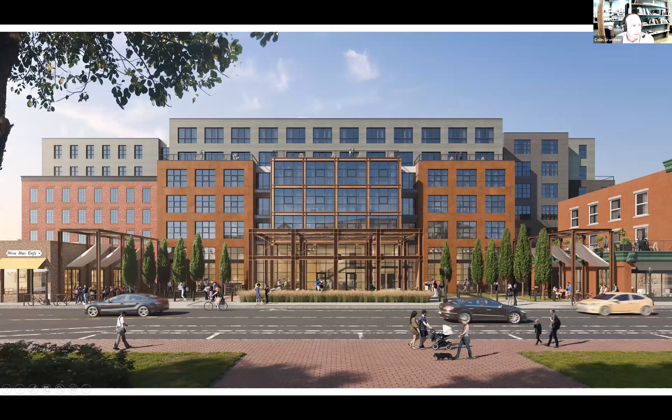The design team worked diligently to respond to the design reviewer comments.

The nexus of the project is really this central courtyard opposite the police station, seen as the draw for the project, creating a nice public or public-private space on the way to the train station, and helping fill in missing gaps in the streetscape as you transit between the train station and Washington Street, while also creating an enriching place for residents and patrons to enjoy.

One of the comments was related to landscaping. We worked hard to reduce the landscaping and the appearance of no-walk zones - excessive planting beds or plant material that would make people feel uninvited into the plaza. We've developed a bosque concept of trees, very much limbed up in stems that meet the plaza material. The green surface is seen as a minimal turf, just covering and infilling the design of the plaza where the trees are.

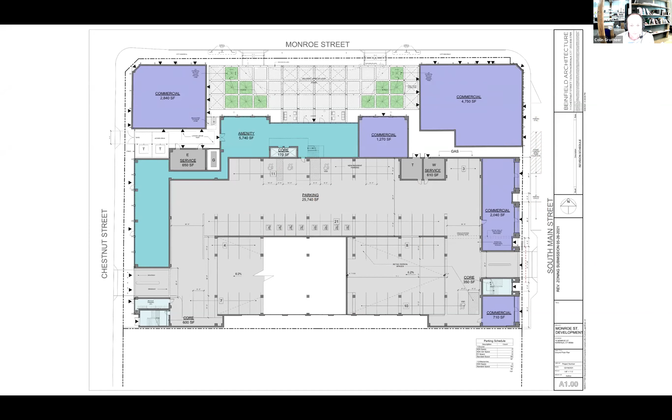That pretty much wraps up the first floor. A quick look up above, we've got a second tier of parking, which is how we get to our 157 spaces total.

This is the typical residential level at the courtyard. There's a small resident amenity space, as well as your typical appointments in the central courtyard, such as a pool, some sort of hangout bar structure yet to be designed, likely a shade structure with grill stations, and other amenities residents use, as well as lounge areas. The units on this level have their own private terraces fronting the landscaped courtyard, with a southern exposure, so it should get good light throughout most portions of the day.

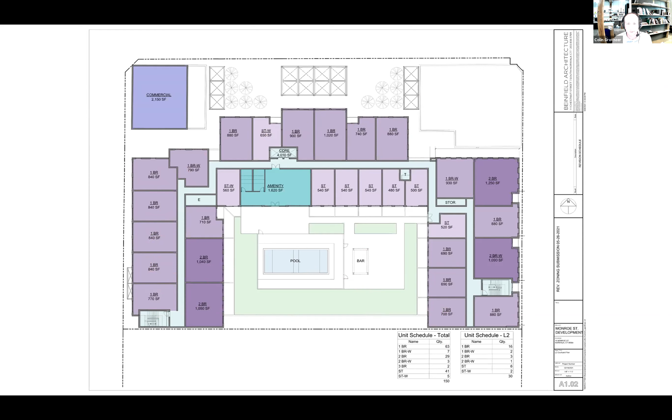The floor plan replicates itself up through the building. At the fourth level, per zoning, we step back, so it gets a little reduced, and the unit typology changes on the street frontages. The units that front to the north on the courtyard have relatively gracious private terraces, as well as good views, as do the eastern and western units that are stepped back, so you get some very nice private space up there. The interior program remains the same and consistent with the program below.

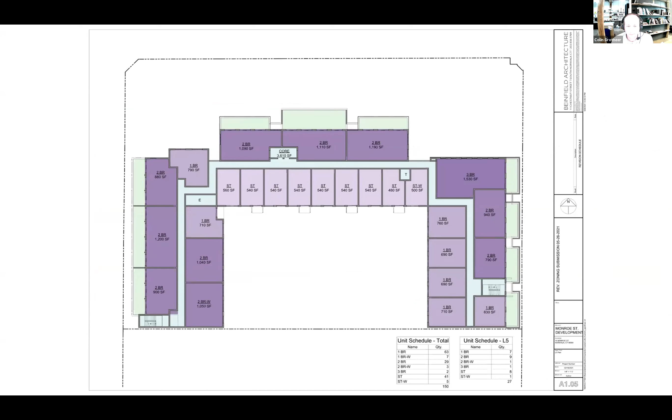Getting into the reviewer comments on what we're doing to the historic or existing buildings, number 18. Can you go back to the design and point out where the workforce housing units are located? I can cover that, I have a whole slide for it. Okay, that's fine, you can come back to it. Let me just make a note, workforce, before I kick it to Mike.

Going back to the reviewer comments, he was curious what we were doing and proposing on the existing structures. This is number 18, the Central Hotel. We'd be cleaning up the masonry, stripping it of the existing paint, repointing and repairing it as needed. If we deem that repainting is necessary, or in the interest of the building, then we could repaint it as well. We'd be doing repairs to the upper cornice, bringing that back to life, and extending the retail entablature all the way down Chestnut Street. This is the Chestnut Street elevation we're looking at, and reopening the existing and previously existing window openings, as well as installing building mounted lighting to light the sidewalk.

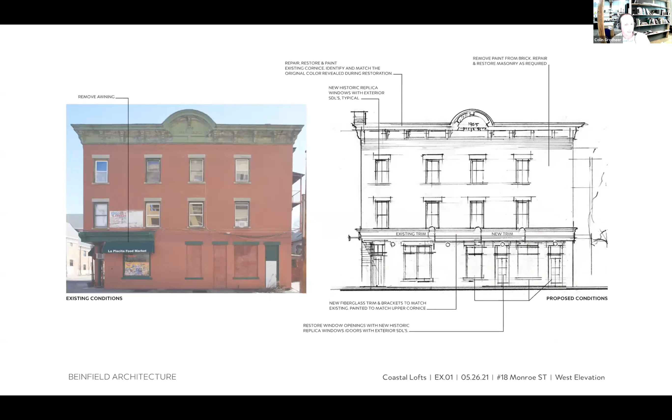Much of the same is happening on the north elevation, adding new awnings and new storefronts. There are existing appurtenances and fire escapes here that we'd be looking to remove and repair whatever damage was caused to the facade by their installation, and take the existing doors and return those to being windows, so it's a much more architecturally consistent facade with the nice character this conveys to the street.

You can see this is one of the steel structures flanking the plaza that we're proposing here. That would allow the tenant on the plaza side of the building to have some covered and shaded space that's also visually interesting, and somewhat mitigate the scale discrepancy between the two flanking existing buildings. We're also proposing, if possible, a small roof terrace for the office tenants in the upper stories of this building.

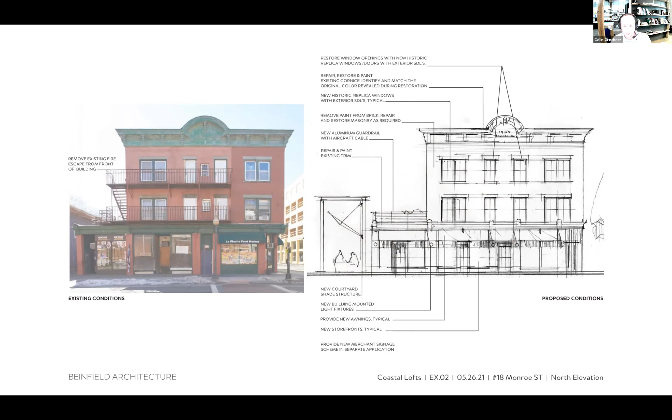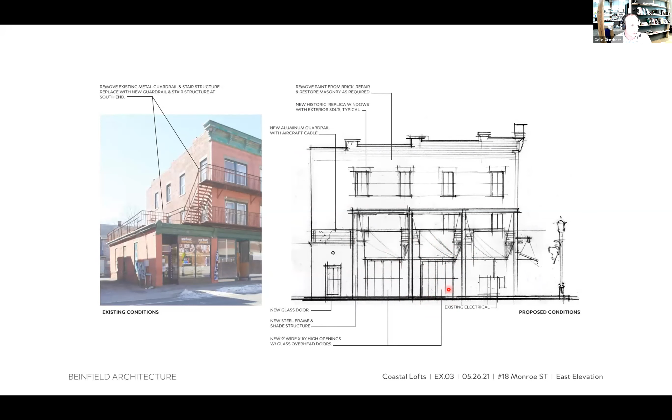This would be a view from the courtyard, where you can see the removal of the existing appurtenances and the creation of the roof plaza or terrace, and then the opening of some existing openings. There are 3 existing openings here, so we're trying to keep within those or expand them slightly, keeping the same classic vocabulary, and infilling them with some glazed openings and access, so that tenant can access the courtyard and take advantage of the space we're creating.

There's also some steel work on the back of the building that we'd be looking to remove, and this little shed here—really clean that up and reprogram those windows, give it new windows and that sort of stuff.

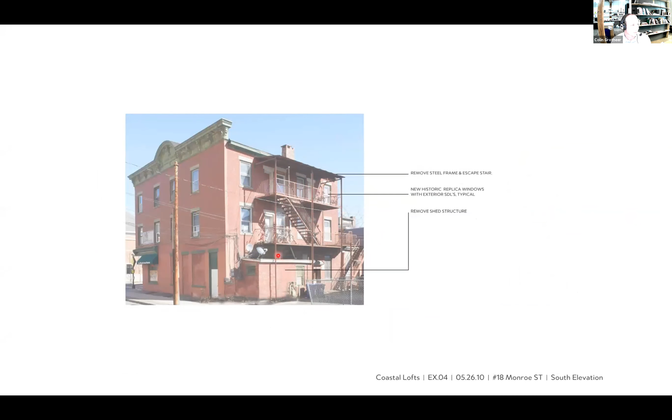Looking at number 8, it's much the same. We'd be looking to unify the signage with a future application.

Thank you. Excuse me. Getting water.

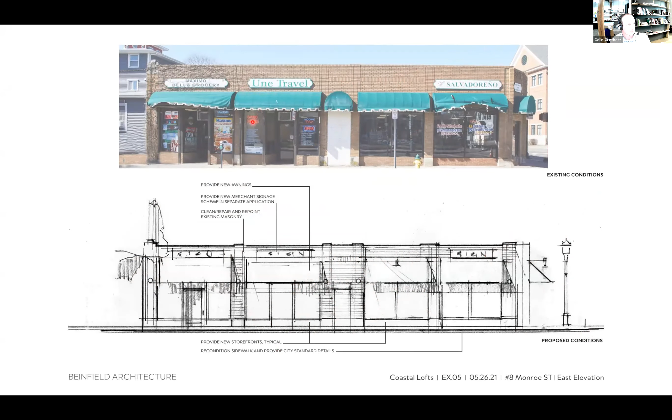We'd be looking to unify the signage package, provide new storefronts, clean up the masonry, install new building mounted lighting. Yeah, I think that's pretty much the extent of that one.

And then on the plaza side, which is a few slides later, we'd be adding some new cladding because this is really just a blank wall and doesn't have any openings. So we've looked at adding some storefronts and some new Corten cladding to give some more visual interest to this part of the building.

Are you expecting the same tenants to be there? Yeah, well, one of the things that Matt mentioned is that this has longstanding tenants in the building, and they're looking to maintain those tenants and keep their businesses going. So hopefully just replacing things that can be done and upgrading while they can stay in business. So not looking to relocate them.

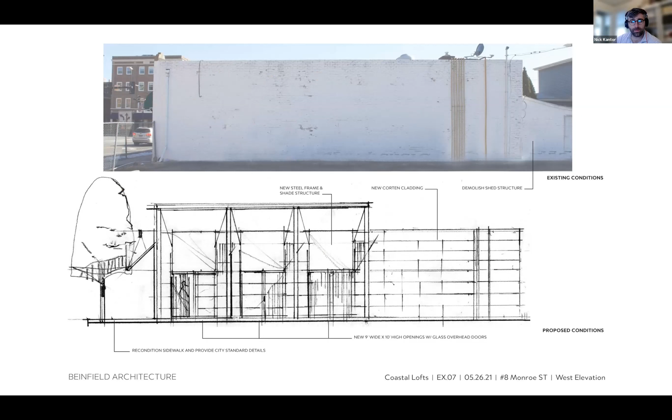This is just an example of our vision for those shade structures. It's a steel frame with shade elements that are suspended from it, but completely separate from the existing building. So those would be built out for the use of those tenants, but and anyone else, as a separate structure.

Colin, I'm sorry for interrupting. Whoever has that person speaking in the background, can you please mute yourself so that we can hear Colin's presentation? Thank you. Please continue. No problem. Thank you. Yeah.

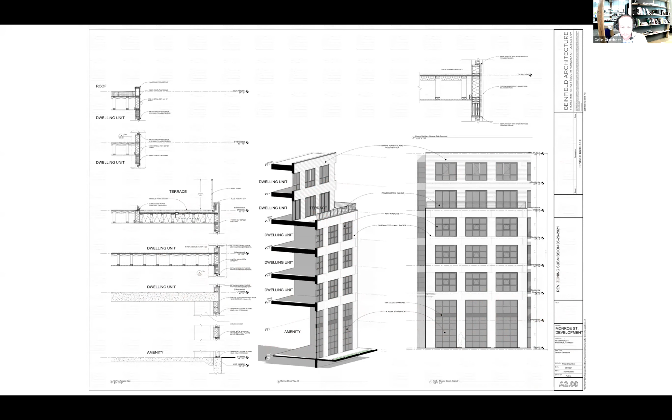This is the Chestnut Street facade. This is seen as being two different types of fiber cement lap siding, which we're also doing at the One Chestnut building, two different exposures. There's a tighter 4-inch exposure here, so very, very tight linear bands, and then it gets

wider at a 6-inch exposure at the upper portion in the step back of the building. And these units have a nice terrace at the step back. Then there's a little bit of a recess of the facade at the Chestnut Street level, pulled back to create some depth and more sidewalk space and room for plantings

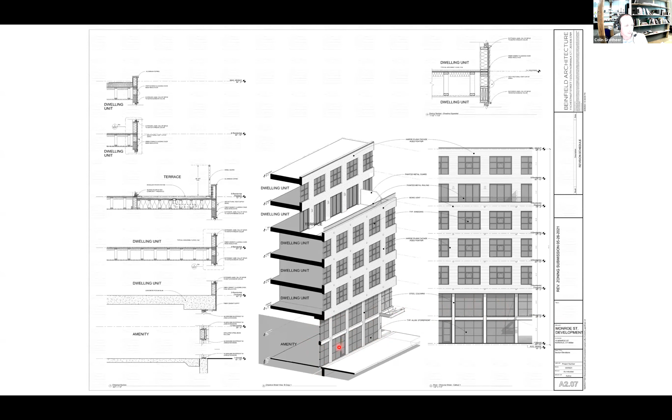and visual interest at that level. You can see here there's an architectural canopy that's been added to the garage entrance on Chestnut Street.

South Main is a series of 4 almost mercantile buildings, appearing as 4-story, 3 over the retail level. Still seen as that, but we added some more embellishment and detail work to those. What is seen as a simulated wood built-up cornice at the top of the building is also creating the guardrail, so there's no need for a secondary railing there. That's being taken care of by the extended parapet.

We've got some additional brick detailing in the head and the row lock sills that are being provided. The storefront is being recessed far enough back so that the door swing is not going to impinge on the pedestrian passage as you go down the already narrow sidewalk.

And then we've adorned it with some of these patera plates that are often used as decoration to tie back to the historic structure inside the building. These are purely decorative. The upper portion is the fiber cement cladding that we're using throughout the building.

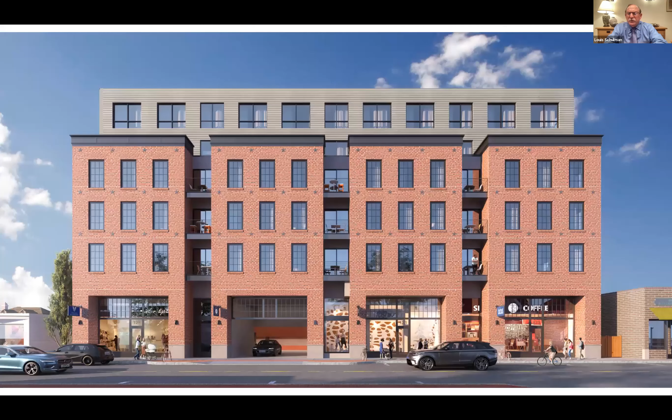Colin, are you using any of that fiber cement on the lower part of the building? I think only in very secondary facades. We may have it coming down in some spots - let me go back to the overall rendering. I think it may come down in this space between the two buildings, a little bit closer to grade. But in general it's at the upper levels, and it may also come down in the area where nobody's really going - more of a back of house, access to mechanical rooms and stuff like that. For the most part it's up above at this upper penthouse level, and back in the courtyard area.

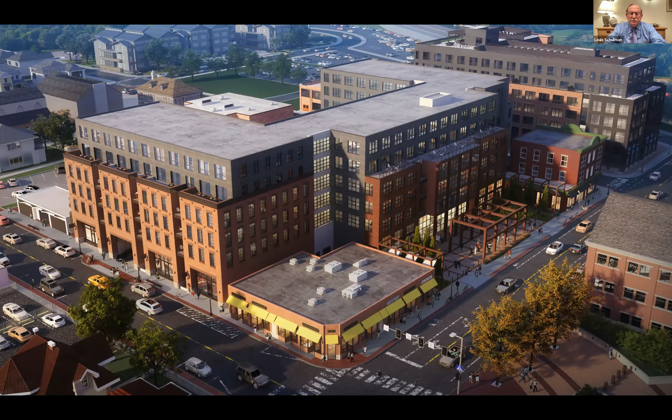This is just a rendering indicating that, showing how we feel that's going to look with the brick detailing, the heads and sills, the patera plates, the on-street parking, and the bump out that's coming out, some potential retail stores. There is access - we do have a potential pedestrian access that could be opened up through here to get to the garage. This is exit discharge from the upper levels of the building.

So we've got 2 separate retail zones that could happen here, depending on how that wants to get subdivided. You could have up to 3 tenants with relatively modest stores, or you could have one larger shop front and a smaller one that's about 700 square feet there.

The garage entry is seen as blending in by maintaining the divided lights that are carrying across in the shop front there, to bring the scale of that opening down and make it not feel quite so big.

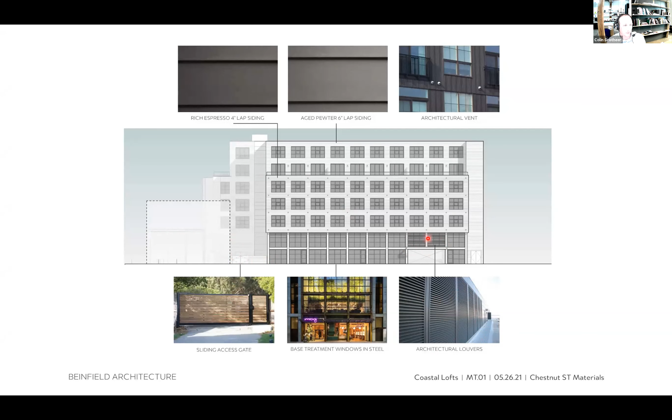We'd like to see nicer architectural vents - it's our inspirational image for the lower portion, as well as the center portion of the Chestnut Street facade, as some sort of ipe rolling gate here to control some access to the alleyway there, and then some architectural louvers for the garage ventilation that we'll undoubtedly need.

The central facade facing north is seen as being this primary steel structure, with Corten cladding on the left and right, some fiber cement panel in this area with the lap siding at the upper levels there.

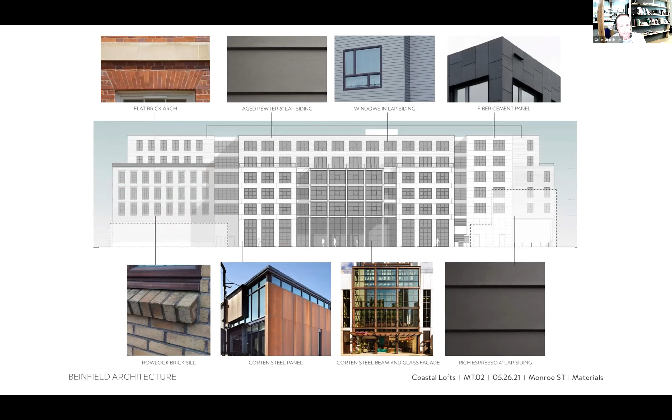And then this is being seen as a continuation of that mercantile building wrapping around, whereas I believe previously this was clipped and just the fiber cement siding, but we felt with the changes we were making it made a little bit more sense to bring that around and have it engage over the top of the 8 Monroe building in that instance. So we're very pleased with the way that came out.

There's just some detail of what we're thinking on the South Main, many of the same images, just a detail of the pattress plate. We've used stars before, in particular I think you can see those on Sono Loft. Some examples of blade signs that could be installed by the merchants as part of the future signage package.

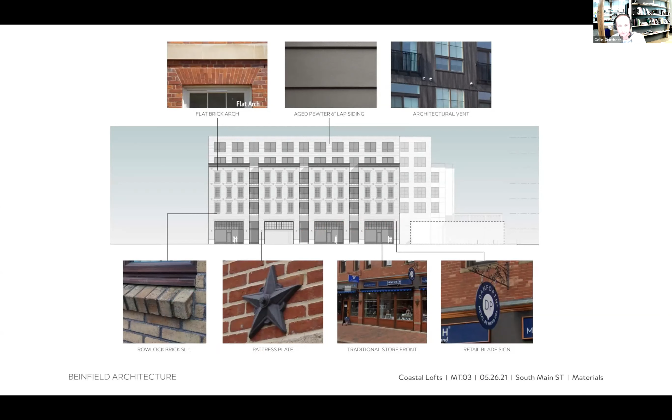They stick off of the brick piers, with a traditional storefront and the rowlock brick sill. We did colorize the southern elevation since it's on the lot line. There's not a ton we can do there since we're limited in openings on the large facades, but we are providing the green screen where we're stepping it back to get some ventilation into the garage.

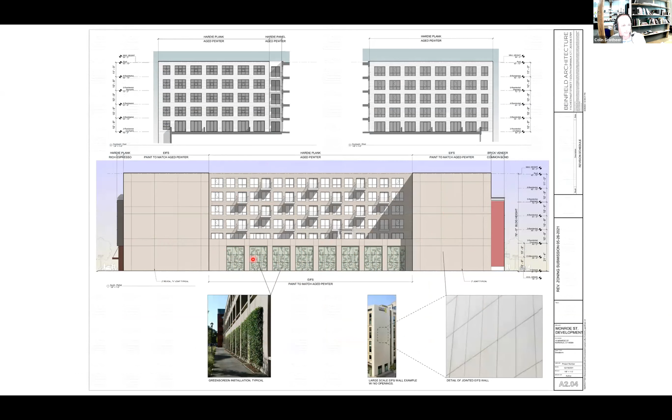Just to give something to that facade. I think with that, I'll pull up the workforce housing and then I can kick it over to Mike.

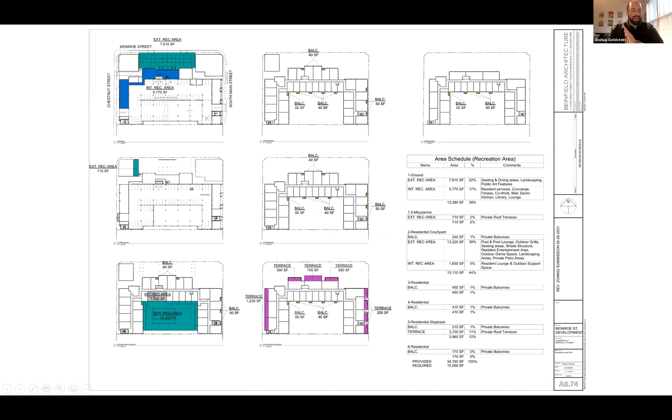Let me note that Joshua Goldstein, another member of the commission, has joined us. Hello, apologize for my tardiness tonight.

Okay, so I'm not sure if I can zoom in on this, but this is the 15 workforce units. So we've got these locations, one here, one there, one there, there, and there and there. So we worked to disperse them as reasonably as we could throughout the building, across all the floors.

So the unit types are proportionate to the overall unit count as well. And this was - so, I mean, are they the same or varying square footages?

How big are the units compared to everyone else? They're not any smaller. We picked units within the stack of like units to be the workforce units. So they're not singled out as one stack of different units. It was dispersed as best we could throughout the project. The layouts are exactly the same and the finishes will be exactly the same. Our contractors won't know the difference when they're constructing this, if it's workforce or not.

Considering this is a public hearing, just to answer the basic question, why only 15 workforce housing units? That's currently the zoning requirement - it's 10% of the overall unit count. In addition, in this zone, we will be paying a 1% fee. That happened I think in 2018 as part of the rezoning of this district, and that fee goes to the city to be used to support affordable housing creation or preservation throughout the city.

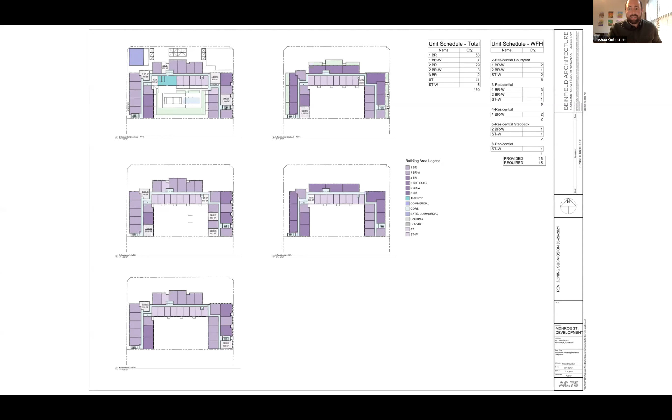Sure. So the property just to the south here is 79 South Main. It actually extends from South Main to Chestnut Street. We've had a couple of meetings with, it's owned by a nonprofit affordable housing group, Mutual Housing, and they're aware of the project. We've had a few conversations with that board about the project, and they haven't voiced any real concerns. And pretty much everything across Chestnut Street, there's really no residents there except for the 16 residents that are in the Skirt Factory lofts that we recently renovated.

And then the church comprises the majority of the balance of the block, the police station's across the street. The same board that owns 79 South Main actually owns the houses kind of on the corner of Hanford and Chestnut. And then the other conversations that I've had with Mr. Barton, who owns the buildings on the other corner of Hanford and South Main, on the northeast corner there, who recently renovated those two buildings, he seems to be in support of the project.

Do you plan to reach out to, I believe, South Norwalk Citizens for Justice, or to meet with the two council representatives for District B? So I think Darlene was in, she was, I'm not sure if she's on the board of Mutual Housing, but she was in one of the meetings with the board of Mutual Housing. So we didn't discuss the project with her. And we happily can extend an invite to the other local councilmen.

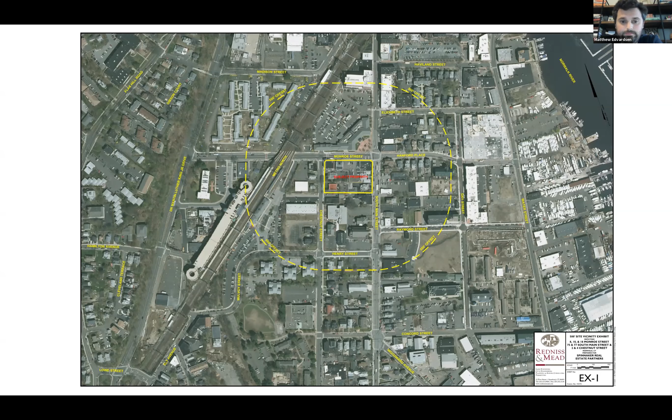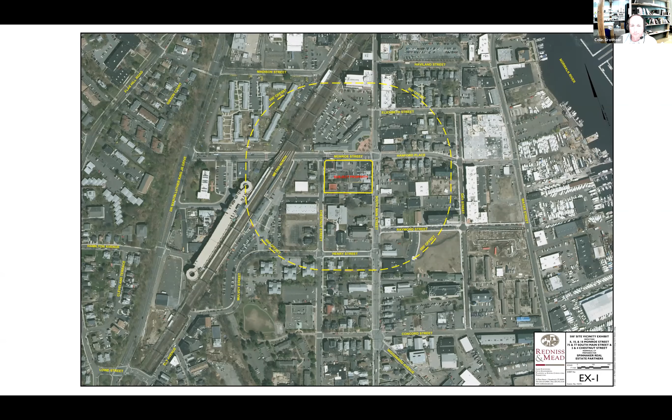Okay, Colin, we interrupted your presentation. Yeah, no, I was pretty much closing and I was ready to move it forward to traffic. Okay, so Mike, you're up. Thank you, good evening, Mike Galante, Hardesty in Hanover.

Under the new development, there is a parking garage with 157 spaces. Under the existing development, there's an at-grade parking lot, and certainly on-street parking to accommodate the commercial uses and the residential buildings on the properties.

Since we're in a pandemic, we used those approved traffic volumes for a 2026 traffic condition as a base, and then we added in the development we're talking about tonight on top of that. The peak hours were typical: 7 to 8 in the morning, 4:45 to 5:45 in the afternoon, and on Saturday, 1 to 2 p.m.

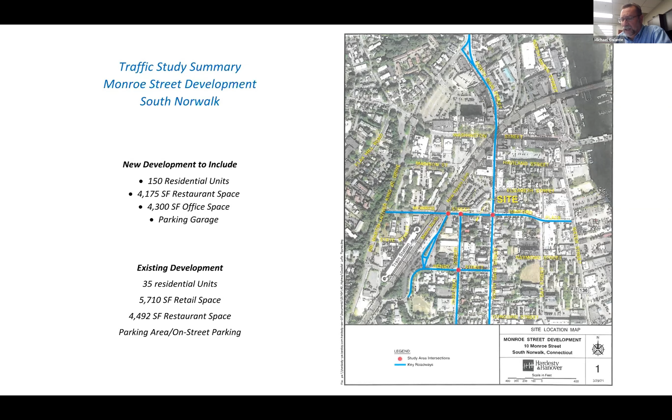You can go to the third slide if you may, Colin. In the traffic study, both the one from March and the one from May last month - I'll explain why there are 2 reports in a minute - the report carried the volumes for the 4 intersections during the peak hours I mentioned: AM, PM, and Saturday midday, which were the time periods we allocated and analyzed a few years ago for 1 Chestnut Street. It just made sense to be consistent and move that forward, adding traffic on top of that condition. The design year is 2026, 5 years from now, which is a requirement of the city itself.

The purpose of the first traffic report was, as mentioned, the access to the garage was from Monroe Street, which is now a commercial space where the garage opening would have been. Based on discussions with the city traffic department, the team had many discussions with the traffic department and others within the city. There was concern about having that access to Monroe Street, coming out to Monroe Street, which has traffic volume and queuing in front of it from the traffic signal at South Main Street. The recommendation was to not have that driveway for a garage, but have a driveway to South Main Street and a second driveway to Chestnut Street.

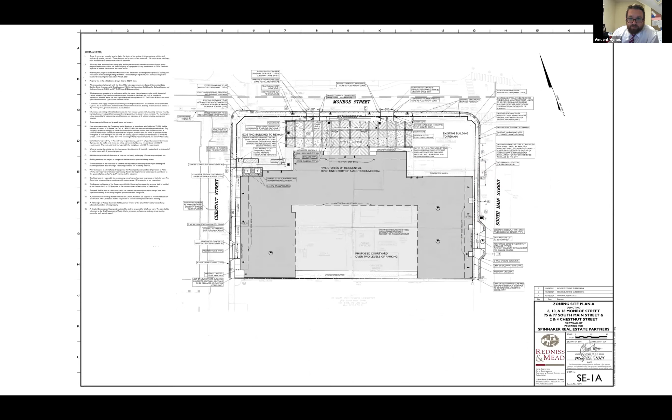Moving to the utilities, the team has been in discussion with all the various utility companies, and right now everybody has indicated they have adequate supply for the development. Water, gas, and electric utilities are serviced from the Monroe Street infrastructure. The sanitary sewer is connected down through the garage entrance out onto South Main Street, and as discussed, that was approved by the WPCA.

And then for stormwater management, there's a single dry well on the site in current conditions, which catches a minimal area. Other than that, there's no formal drainage infrastructure. So as part of this project, in conjunction with the city's stormwater manual, we're collecting the stormwater runoff to treat the water quality volume, but also to control the peak rates of runoff off of the site, so that we're not overburdening any of the existing city infrastructure within the surrounding streets.

Where applicable, any of the existing utilities being removed from any of the existing buildings will be removed in accordance with the local utility company and their requirements. And with that, I can take questions if any related to the utilities or the site design.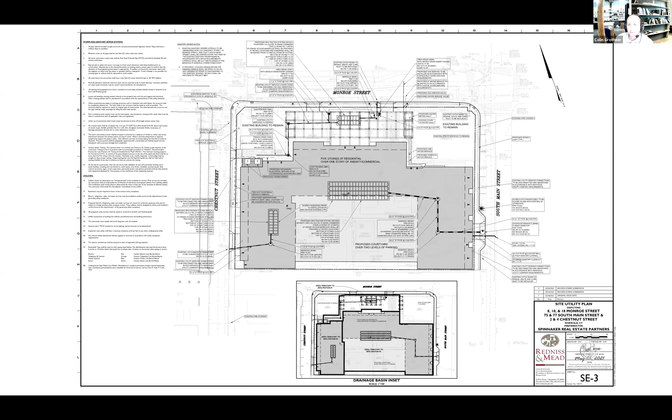Trying to figure out where my video went. Oh, so you put that up. I thought I did that.

So the courtyard, as Colin and Matt had said earlier, is obviously the optimal focus and optimal location for the project. The way it's been approached in the scheme is to have it, from a pedestrian perspective, be as permeable as possible. So in dialogue with the peer review, and then within the team, and then within the city, the way we're accomplishing that is to really not have any intermediary height plant material, except for along the outer edge of the steel structure at Monroe.

This drawing shows a planting bed, and Colin, the rendering shows it pretty well too, but this drawing shows a planting bed along that edge of something that could be like a Calamagrostis grass, which there's an image of in the package. But for the most part, everything else is clear trunk trees that would form those two sort of bosque areas on either side of the center, that have a walking surface all the way around the base of them up to the trunk. And again, there's another image of that in the packet that you have.

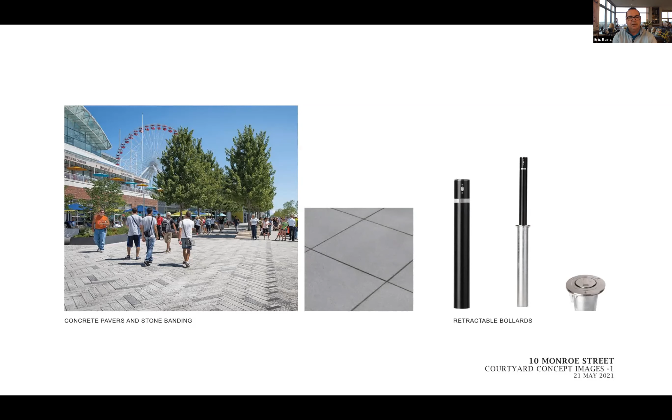So Colin, if you go back to the page, then as was mentioned earlier, from a vehicular perspective, when you turn off of Monroe, the portion where people would drive would be delineated by bollards, so that a driver can see clearly where the drive path is, leading up to the steel posts of the structure in the center, which also has bollards in front of it, just so there's a continuation of the same material to carry the eye of the driver through the space, and also to help protect the columns.

And then as you exit, there are more bollards on the way out. Across the front, closer to Monroe, there's also bollards on either side of the structure, so that people understand that it's more of a non-vehicular zone, since this is basically a 2-lane pickup, drop off, or drive through. As the graphic shows, a car could be loading closer to the building, and another car could be waiting on the other side.

So we tried to build in as much flexibility as possible for both pedestrians and a very intuitive layout for the vehicles and drivers. The next page is more of an event scenario. Utilizing bollards in a non-event, if you see the bollards that block off the drive, in an event those bollards we're calling retractable bollards. They're not mechanical, but they're retractable, so they could be lowered for non-event use of the space.

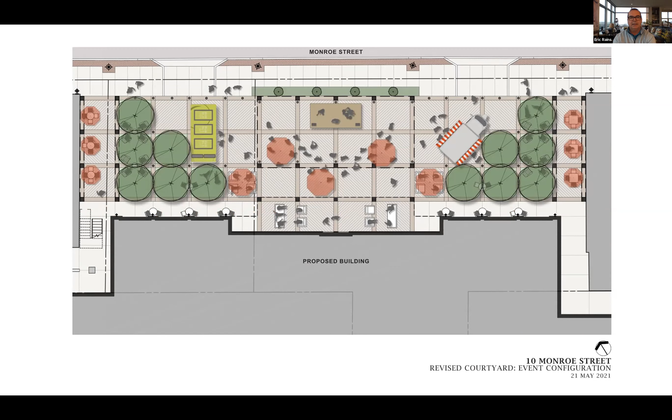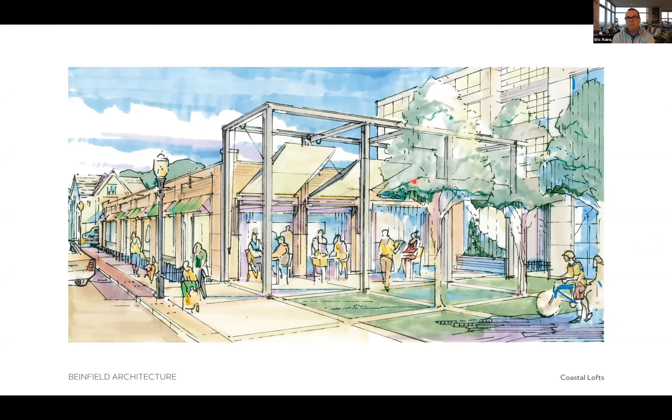Question about, is the courtyard a covered space? It's not covered. However, the two spaces outside the cafe or the bakery on either side do have a canopy that would be put within the structure. So it is covered more for shade, from light, but not to make it all weather.

I'm thinking, if you can go back to that picture of that entrance area, I'm thinking during the winter months, the possibility that it's still a relatively small area. I'd be a little bit concerned about buildup of snow or ice, cars coming into that space and spinning out, and damaging either the building or injuring people in the area.

Yes, Mr. Schulman, one of the advantages is the paver that we're showing is designed to be used in vehicular applications, and because of that, from a maintenance perspective, the surface is smooth enough that it could be plowed very easily and maintained.

And then the zones outside the vehicular portion of the drive, from a snow perspective, they're very easily plowed, even with a piece of machinery. So the obstacles within the space are very far apart, so that if Spinnaker or the management, the maintenance staff wanted to maintain this with even a ride-along piece of equipment, like a ride-along snowblower, they could do that. So the maintenance would be as easy as possible. Thank you.

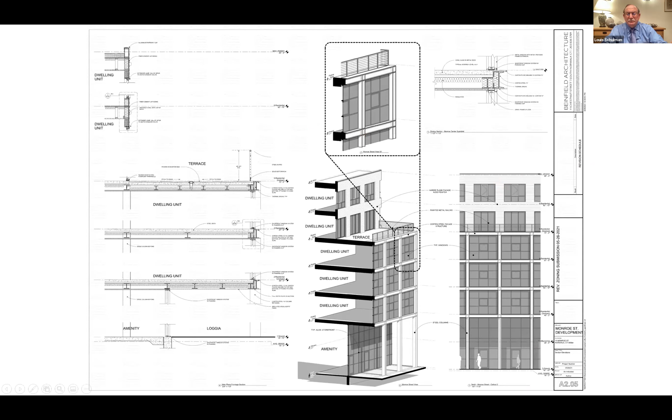Thank you. Are the pavers permeable? They are not permeable. Vincent could speak to the drainage system further, but these pavers are not permeable. Well, the nature of pavers is some degree of permeability. It's not sealed, but they're not a water storage system.

And then why do turf instead of natural grass for the tree areas? Well, we're hoping there's a lot of wear and tear, and the turf will hold up. If you imagine a sports field that gets a lot of wear and tear, the grass takes a beating and requires rest and recovery. So in this case, we're wanting to use that material so it can withstand that better.

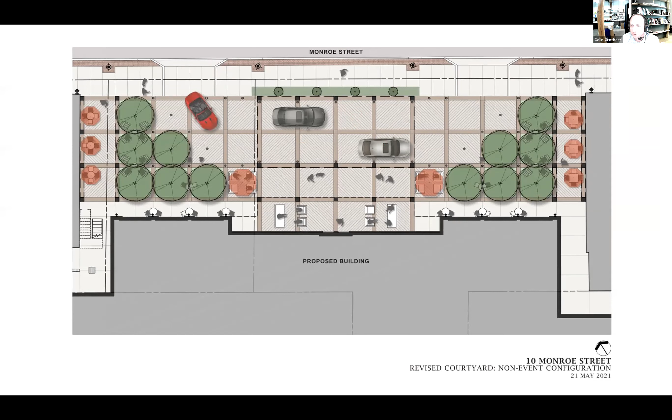Well, thank you. I believe that concludes the team presentation of the consultants, and we're open for questions should there be any on the material presented. That's it for us. Are there any additional questions right now from the commission members?

Are they going to be planting any street trees on Monroe or South Main or Chestnut? We've been asked to eliminate obstacles on the South Main and Chestnut side. We do have plant material on the Chestnut side that is closer to the building, and then on Monroe we have additional lamp posts. But at this point, all the tree plantings are happening within the courtyard, and the shrub and ground cover plantings are happening on Chestnut.

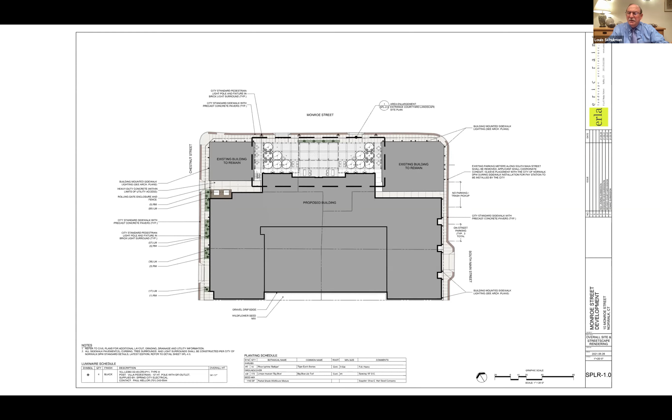Anything else before we open this up to the public? All right, if not, Brian, would you explain how people who want to testify can do so?

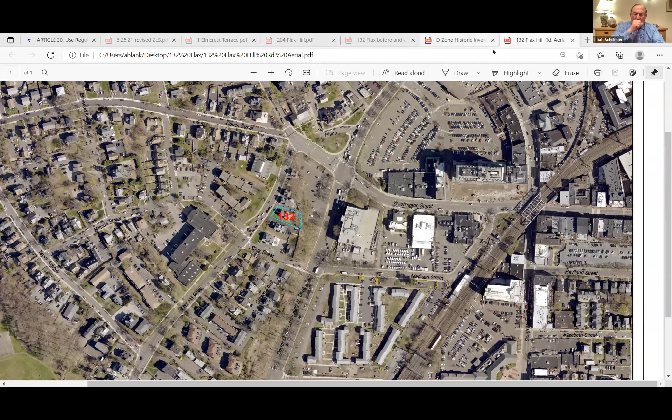So Workforce Partners owns 132. It's got an existing 3-family home, or 3-unit home, on the property. What we'd like to do is renovate the interior. It's really an interior renovation job, but it's to redo the inside of the property and bring it from 3 units to 5 units. There would also be some rehabbing of the exterior of the structure, but we're not adding square footage. It's not adding a new building. It's not a big project—simply redefining the interior space to add 2 additional units, which would also result in some changes to the parking and the access drives for that property.

There's a text change amendment in front of you, as well as a special permit application. I'll take just a couple of minutes to go through the text amendment and then the special permit application. This is just your first review. We have Mark Hopper, who's the project architect—he'll describe for you some of the architecturals on the project—as well as Ricardo Ceballos, the project engineer, who will also speak with you briefly tonight.

Under the existing regulations in the D residential zone, certain of your requirements can be waived or modified to encourage the preservation of historic structures. As I mentioned, this home is on the historic inventory, but under the existing regulations, that only applies to structures on larger parcels within the D zone. Right now it applies for 12,000 square foot lots or larger, which is really just a couple of properties in the D zone. We proposed a text amendment to reduce that minimum lot size requirement from 12,000 down to 9,000 square feet, which would make this parcel qualify for relief under the historic regulation.

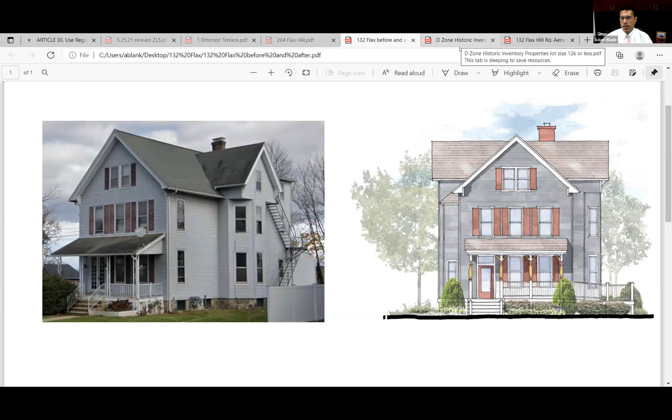We got some feedback from your staff after the application was filed, encouraging us to amend the proposed text change to entirely eliminate the minimum lot size requirement, so that all historic structures within the D zone could make use of the historic preservation regulation. We have now amended our application to state that we're seeking elimination of that minimum lot size in its entirety.

We put together, with some assistance from your staff, an inventory, which is in your packet, of the parcels that are historic structures on lots of 12,000 square feet or less in the D zone. I'm just going to quickly scroll through—you'll see some of them are fairly nice, some of them surprise me that they're on the inventory, but there are certainly some structures worthy of preservation in this class. I believe we're talking really only about 34 properties within the D zone that are on the historic inventory and are less than 12,000 square foot lots that this proposed text amendment would apply to.

I know that you recently on East Wall Street approved a similar text amendment, and actually I believe it was Commissioner Roina, I may be mistaken, who commented, and some of the public had commented about a dislike for that amendment because it only applied to a couple of properties within that zone, and that it might make sense to broaden the scope. So I think this, although we're in a different zone here, does accomplish some of that goal to encourage historic preservation irrespective of the size of the lot. So that's in a nutshell, the text change in front of you.

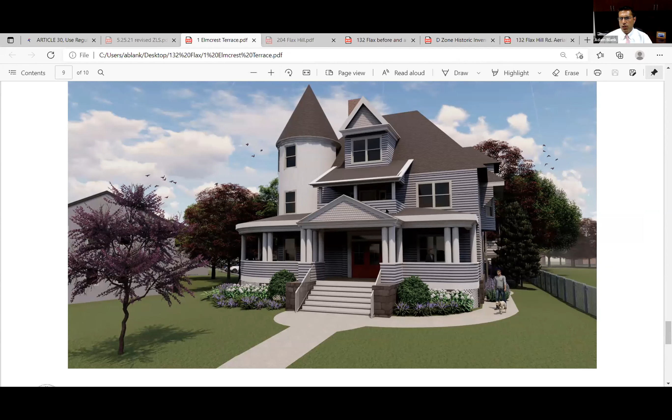Within the last year or so, they've filed at Elmcrest Terrace - this was a historic preservation application that came in front of you and you approved within the last month or so. And a little further back, but probably within the past year, was 204 Flax Hill Road, again a historic preservation of another Workforce Partners property for a rehab that you folks approved as well.

As I mentioned, on this particular property there's an existing 3,000 square foot 3-unit multifamily structure. We're going to reconfigure that to make it 5 units. The access to the site will change, with a shared entrance between 138 Flax and 132, with new parking put in.

You'll hear Mark Hopper talk about the architecture, and Ricardo will talk a little more about the drainage. But the applicant does own 138 Flax Hill as well. It's shown on this zoning location survey and some of the documents you've been provided. There's no application in front of you specific to 138 Flax Hill - it's for illustrative purposes only.

But I will say that if we are approved for this project at 132 Flax Hill, we would then be filing an application at 138 Flax Hill simply to reconfigure their parking lot. It's in discussions with staff, and it's anticipated that would essentially be an over-the-counter permit and wouldn't come in front of you. But there will be a shared drive for both properties. We'll be creating some additional pavement or impervious surface compared to what's existing at 132. On the other hand, we're going to be reducing the impervious surface and creating some additional green space at 138 based upon this reconfiguration.

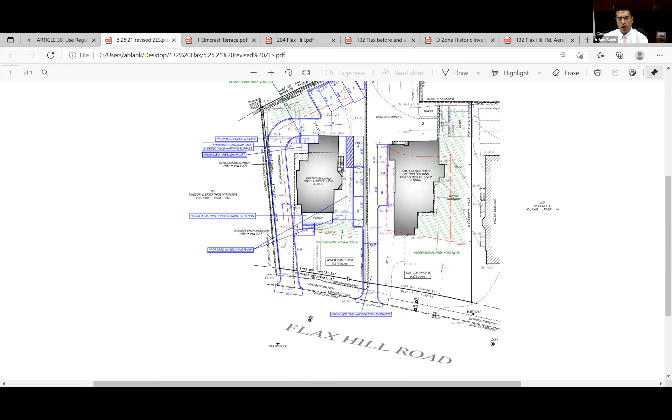In a nutshell, those are essentially the two applications before you. We do have a landscaping plan that's in your file. We're not going to go through that tonight, but if there are questions about it, we can address those in more detail at a later public hearing.

There's a traffic impact analysis that was performed with the two additional units. We didn't have the traffic engineer here this evening, but you may hear from him at the public hearing, and the report is in your file. We have sign-offs from every city department and agency other than Department of Public Works. We've had some back and forth with them, and we're just waiting on their final sign-off currently.

Before I turn it over to Mark Hopper and Ricardo Ceballos, our asks of you folks this evening are: first, that you refer us to the Planning Commission on the text change; second, that you refer us to the Historic Commission on the text change as well, which I believe is required. The Historic Commission considered the text change from 12,000 square feet to 9,000 square feet and unanimously supported that. We envision they will similarly unanimously support eliminating it entirely, but we think it should go back to them because it's a significant change from what they previously saw. Additionally, as part of the historic preservation review, they would review the special permit application and hopefully have a favorable recommendation to you.

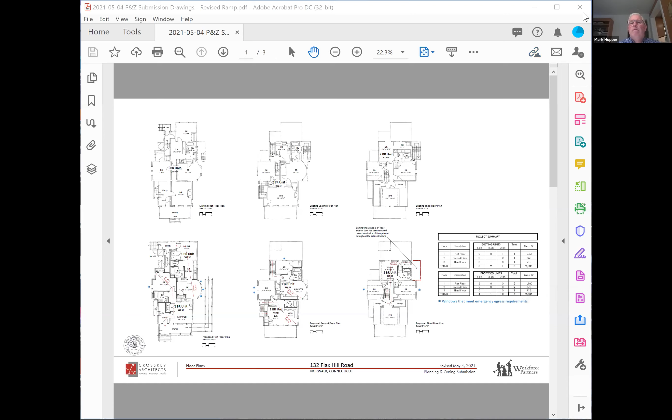As Attorney Blank indicated, this is an interior building conversion from 3 units to 5 units. What we show here are floor plans, with the existing floor plan at the top of the page: first, second, and third floor. The first floor is a single 1-bedroom unit, the second floor is a 2-bedroom unit, and the third floor is an additional 2-bedroom unit.

Our planned alterations are to increase the unit count from 3 to 5. By doing that, we are providing two 1-bedroom units on the first floor and two 1-bedroom units on the second floor. The unit on the third floor will remain as it currently exists.

When we undertake this project, it will utilize the 2015 International Existing Building Code, and it'll be classified as a level 3 alteration since we will be disturbing more than 50% of the building area. With that, since we will now be above 4 units, we will have to provide handicap accessible units on the first floor.

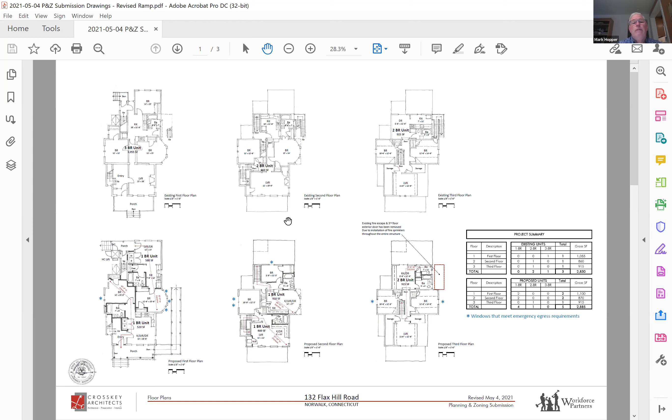Also, as part of this project, we will be fully sprinklering the building, which will allow us the opportunity to eliminate the existing fire escape that comes from one of the bedrooms on the 3rd floor. So we'll be able to eliminate that, which we think is an improvement to the exterior of the building.

From an exterior standpoint, as was mentioned, the building is on the historic registry. It's a Queen Anne style American residence, which features asymmetrical cross gables, steeply pitched roofs, a front porch, as well as other detailing and features, brackets at the gable ends. Those will all remain.

The existing front porch will be replaced as part of the new work for the ramp. The porch will be detailed in accordance with Queen Anne style detailing. Front porches are a very important aspect of the building style, and we've picked up details of the period, which will enhance the historic nature of the property.

We'll also be realigning the front steps to align with the front door. Currently, the stairs are off center, so we're moving them to what would be the historic arrangement for a house of this type.

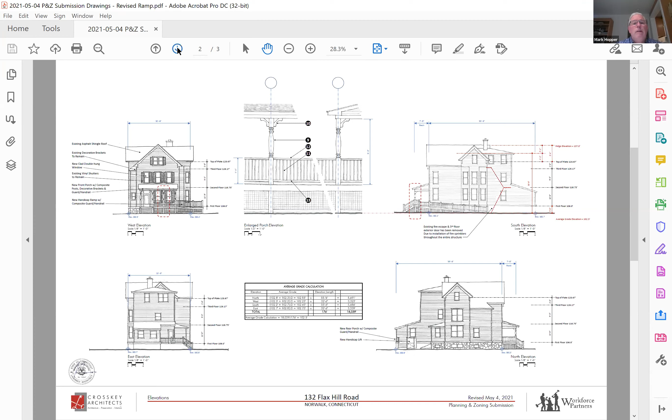Finally, materials. The existing building is sheathed in Dutch lap siding. We will be maintaining the siding and the shutters. Our main focus is at the front of the building where the new porch is, with realignment of the front stairs and the handicap accessible ramp wrapping around the side of the property.

We did have an opportunity to share our design thoughts with the Historical Commission, and based on their feedback, we changed the location of the ramp. So your package showed a revision from our original thoughts. We think that's an important feature that enhances the historic character and nature of the building.

There will be new plantings along the front of the building, which will screen some of the front porch and the ramp to the side. We've also gone to a historic color palette, reminiscent of the Queen Anne style of building. So with that, I'll turn it over to Mr.

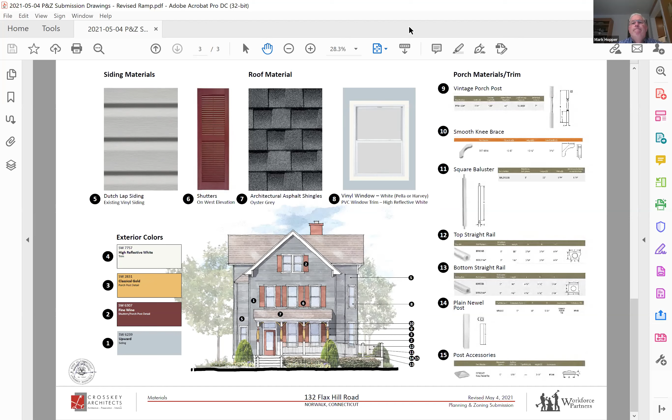As you saw on the plan, the stormwater management system will take care of all these new additional bituminous driveway and parking spaces in the back of the property. The effective area draining to the back, based on the grading we're proposing, will take care of all the ramps, all the roof leaders in the building, the parking spaces, and driveway areas.

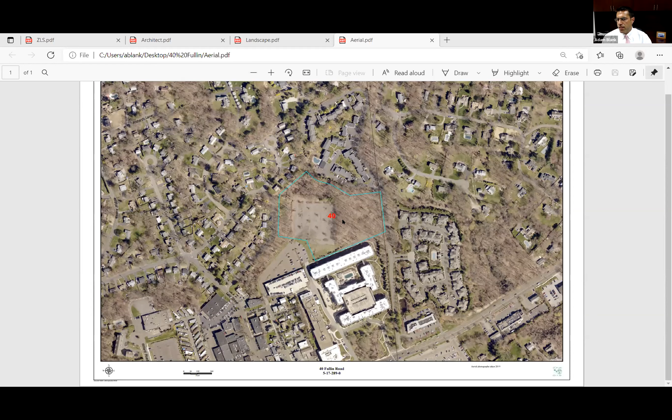Lenny D'Andrea, the project engineer, will give you just a very brief overview of the project tonight, and Matt Pop, the landscape architect, will talk to you briefly about the landscaping. FRAP is comprised of Jerry Efron from Gray Rock and Clay Fowler from Spinnaker. I believe they're both on this Zoom and can answer questions that you may have for the developers.

You've got a traffic report from Mike Galante, who's not going to speak tonight, a housing analysis from David Herbst, and architectural plans from J.A. Jameson Architects. Some or all of them will present at the public hearing, and we can convey any questions or comments you have to them from tonight's meeting.

The units will be handicap accessible, first floor masters. Each unit will have a single car garage, which, by the way, under the regs, satisfies all of the parking requirements for the site. But in addition to that single car garage, there will be unofficial parking - you can fit a car in the driveway, which would provide an additional space. That doesn't count as a space under your regs, but it's there. And then on top of that, there are 25 additional at-grade spaces scattered throughout the project. So we have way more than what's required for parking.

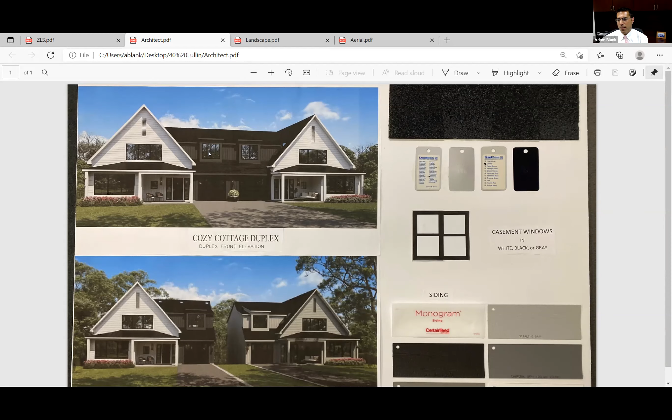Which means that this has to get Conservation Commission approval. We're currently in front of the Conservation Commission, and in fact they are engaging a peer review consultant to examine the impacts the project may have on the wetlands and see if there's any alternatives that might work better. So we're going through that process now, and we need Conservation's approval before you can hold a public hearing and act on this application.

But we are hoping that, and it sounds like they do intend to act expeditiously, but we don't have that deadline yet. So again, we'll let Lenny D'Andrea and Matt Pop speak briefly, but we're not asking for a public hearing tonight, just for you to allow your staff to hopefully schedule that if and when we get our conservation approval. With that overview...

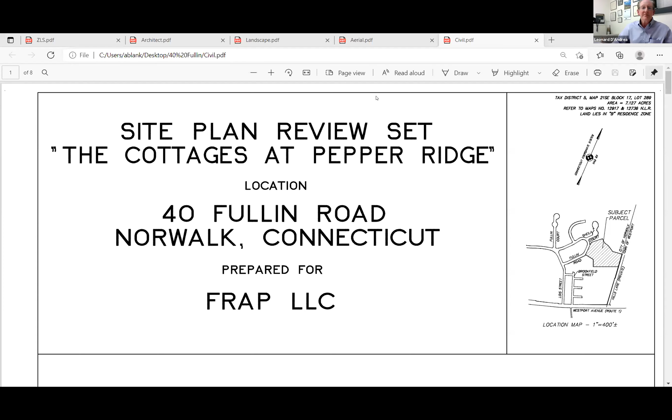The site's a little bit deceiving if you were to walk it as I did. I start from Fullin Road and then I work my way down the slope and hit the parking lot at the bottom of the slope. And it drops about 14 feet.

But then as you continue across the parking lot, which has some grade to it, it then kind of rises up in the center. And when you get towards the easterly side, you're actually at the same elevation as Fullin Road, where we intend to come in. So even though you feel like you're dropping down, and even though we'll have a driveway that comes in from Fullin Road with about a 6 or 7% grade, the site itself is going to be fairly level across it because we're going to try to do some fill management, try to get this as close to a balanced cut and fill site as possible.

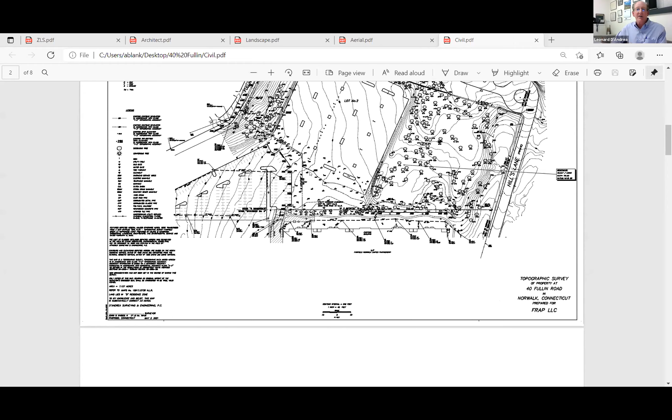So if you can get to probably Matt Pop's plan, the rendering, that's just fine. Because it looks so much better than mine, you know.

So what we did here, the site is pretty well shaped for us, and we were able to do a stacked loop driveway. It's two-way directional, so you can go in any direction, clockwise or counterclockwise, and one feeds off the other. In the center section you have mostly duplexes, and where you're abutting the wooded areas to the east and to the north, we have some detached. We've tightened up the site as best we can, but we've maintained the driveways at 22 feet wide because of our parking requirements and back out areas. Each driveway has a full 20-foot long driveway itself, so you get the added luxury of having a car parked in front of your unit as well as in the garage.

I talked about trying to balance the site with the earthwork, and it's really an iterative process. We're not there yet, we have too much excess cut. So basically when you start looking at the basements that may be excavated and the roadways and drainage, right now we probably feel we'll be lifting the site a little bit more because our goal here is to balance it and minimize any unnecessary truck trafficking onto the adjoining roads.

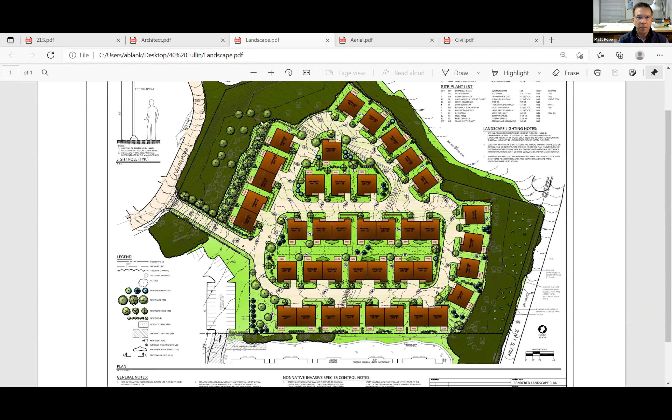The first area is the woodland by Fullin Road. There's a wooded wetland right through here. The parking lot is approximately through here. There's a drainage swale watercourse that runs along the edge of the parking lot, along this red line, which is the wetland line. So the second area is that parking area. The third kind of habitat is that wooded upland area. And then back here by Westport, we have a wooded wetland.

I'll just run through some of the photos that show it. This is a view from Fullin Road looking down towards the parking lot. You can see there's some dumping of debris matter. Back through here, there's invasive garlic mustard.

Are you guys able to see Matt's screen? No, we just lost his screen. You want to try to share your screen once more? How's that? You see it? No, no. Do you see the share screen button at the bottom of the screen? Yeah, if you click that it should pull up a Windows choices. Did it pull it up? No. Well, we could take your word for it. Okay, I'll just go—maybe Adam, if you could just bring up the regular landscape plan. Yeah, that's fine. That's why I let Adam do it for me.

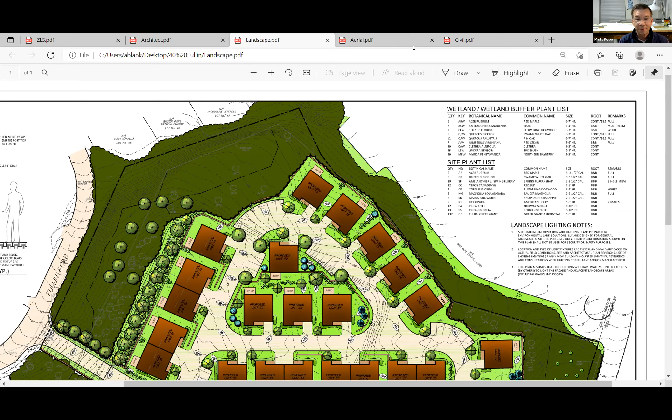Just to touch on site lighting, we have 8 light poles, so we're trying to keep this dimly lit. I think we're going to reduce that further, mainly just keeping a light pole by each parking area, and there's about 5 parking areas. So that's it, quickly. Again, we're right before wetlands, and we're hoping to get this approved in the future.

How many mature trees are you taking down on that eastern side of the property?

Well, I don't know if— I think there's approximately 160 trees coming out. I'm not sure if they're all mature, what the size was, if it was 12 inches and up that are coming out. They're pretty much concentrated within that upland area to the west of the parking lot. We're trying to get that one-to-one, and I think we're going to come in with a revised plan that puts us at that area.

And Chairman Schulman, this is a special permit application. They could go in by right with a subdivision, and there's no restriction—they could take out every tree. I mean, not within the wetlands or the upland review area; conservation would probably have an issue with that. But outside of that area, there would be no restrictions, not that they're going to do this, but they could go out today and bulldoze and chainsaw down the trees on their property outside of that wetland area. Again, they're not going to do that, but the other good thing about not being a subdivision is it'll be an association, and the drainage structures will be maintained so that it improves water quality, and we're not worried about the catch basins clogging or things like that. So it's good that there's an association to maintain that.

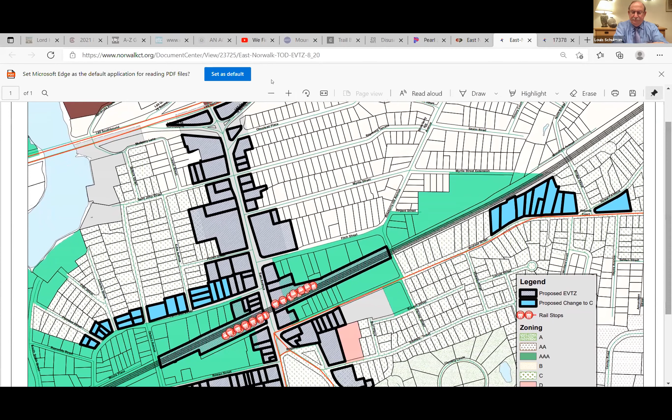Is that all visible to everybody? Okay, let me zoom out a little bit. This map is up on the city page under the application, and if anybody doesn't have the link, I'm happy to share that. Just giving everybody some orientation: here's the Norwalk River, here is I-95 exit 16, here is the East Norwalk train station with tracks on both sides, and here is East Avenue, which is the north-south spine that runs through the middle of the area.

So the zoning appendix that was part of the East Norwalk TOD plan had two components we've discussed in review before. The first is the creation of the EVTZ, the East Norwalk Village TOD Zone, indicated in these grayish hatched parcels. They run on the east and west side of East Avenue, which runs north-south, and also along this stretch down by Van Zant Street, wrapping around the historic cemetery here.

The regulations - right now the majority of these properties are neighborhood business, and the recommendation is to rezone them to the new zone. Also, as you know, there's the study of the industrial zones going on, so it may make sense to hold off on any changes on that until those get wrapped in. Some of the recommendations in this document are similar to what the consultant is talking about, but it may make sense to hold off on that piece.

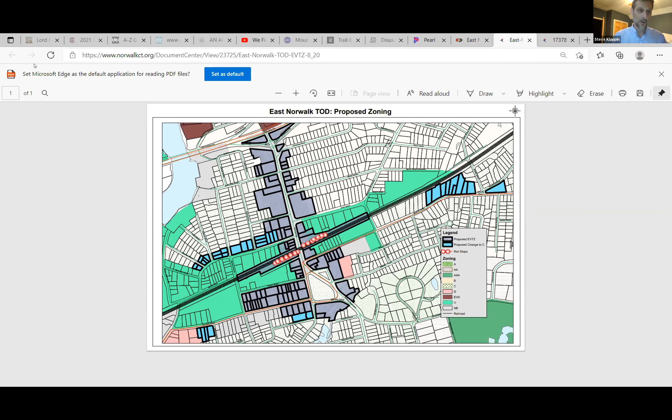Very similar to the lot width requirement. A change is that there is no longer a minimum front yard requirement, and we have a maximum front yard requirement. That says we want the buildings to be a little closer to the street to make them a little more pedestrian friendly. But we put the maximum in there to also allow for some variation, so it doesn't all have to be at the street. Maybe there's an opportunity where they wanted to have a different feature in the front.

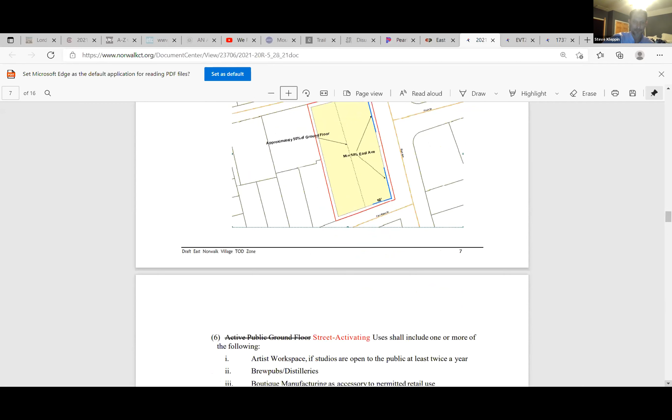Steve, was there any feedback from the neighbors on that?

So this has not gone out to the public yet, it's available on the website publicly. So this part has not been.

This map, this little figure here was in the plan. That was part of the discussion we had during the planning process about the ground floor activation, and there was a concern of vacancy. I think we kind of moved in that direction to address some of that.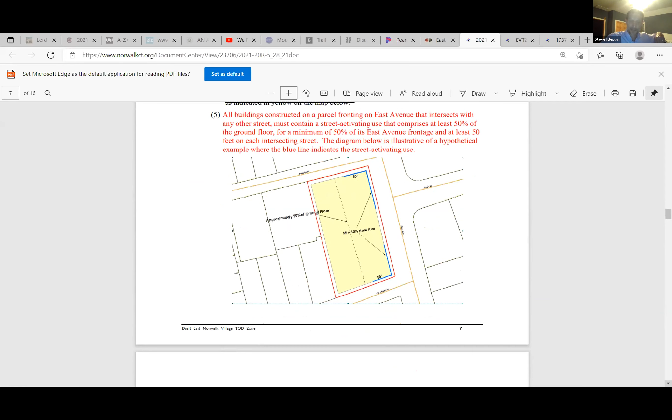This latest plan hasn't gone out for any kind of public comment yet. It's up and available for public viewing, but has not gone out for anything beyond the commission level. I thought the appropriate step would be to get this body to a point where you're comfortable with it, and then we have to go through the public referral process, with hearings, and we can meet with whomever wants to chat about it.

The regulations define street activating uses here, and I think it's a pretty broad spectrum. I know Nick had emailed me about whether this was too limiting, so I'm happy if there's other things you think are appropriate. We have retail, restaurant, personal service establishments, and any kind of other use included. I think that's kind of the idea, we're trying not to limit anything. So if there's things you think are missing or should be included, I'm happy to add those.

Steve, is there a reason we wouldn't just put 'other, as approved by the commission' or something like that, so we don't have to enumerate every single one?

That's a good question, let me check with the law department on that. You always get nervous about having something open-ended, and then somebody proposes something you may not think is desirable, and then they say, well, you said other, and this is other. So that's my only pause on that.

Okay, if not, then I guess we'll put thought into it and see if anything's missing. Yeah, I'm happy to ask that question.

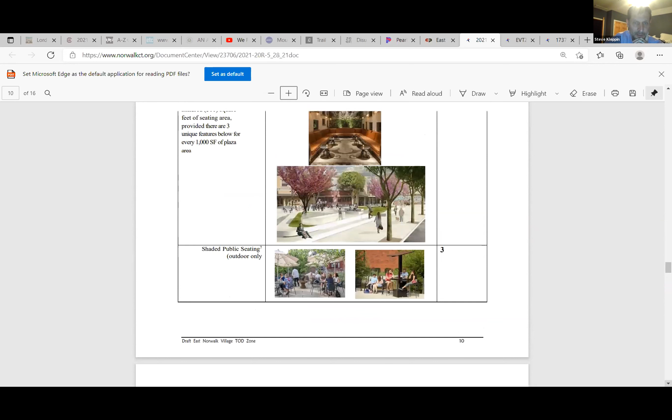Yeah, and I lost my, no, here we go.

So this section gets into more of the sustainable features. We have a green wall where you have rain gardens and community gardens. Now some of these developments aren't going to be able to just provide a community garden, maybe one of the larger ones could. Is that feasible? We tried to put things in there that were desired and indicated that people wanted through the public process we went through, and people talked about community gardens. So if somebody could think that up, they could get some points for it. Again, if we think those points are too small, we could always adjust them going forward.

I'm kind of hoping we see a lot of the rain garden type features because they get incorporated nicely as landscape features. The consultant, TPUDC, who looked at this suggested, why don't you add a pollinator habitat in? So we did provide that, that's why it's highlighted in red text with some different examples of how that could be done. We also have rooftop solar, and green roofs and blue roofs are different options.

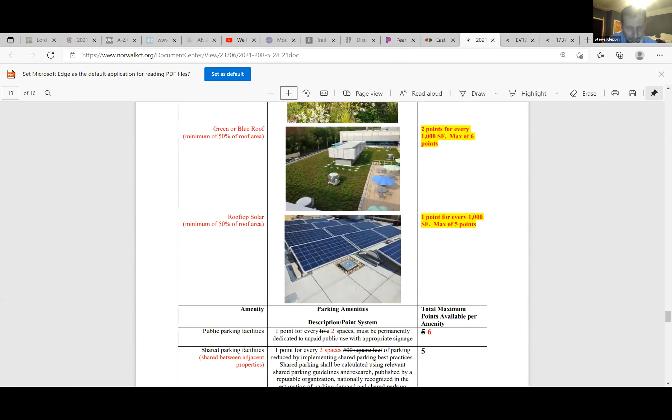A couple other things I thought were unique that came up in the process was the idea that if you provide public parking spaces, you get a credit in the point system for providing those spaces. So if you do 2 public spaces, similar to what you see at Ironworks where they have 4 or 5 spaces on one of the drives when you pull in, with signage indicating it's free public parking, you get 1 point, with a maximum of 6 points within that development that could be realized.

The next section indicates how the points are factored in. As we said, the base is 2.5 stories, 35 feet for the zone, that's what's existing right now. So the density is 1 unit per 1,650 square feet under the current zoning. For some reason I'm not sure how the initial draft got to 1,035 if you did 15 points, so I actually bumped it up to 1,250 for 15 points. That moves in the direction of a little less density, because the other was really just cutting it in half. It just seems to make more sense mathematically to me.

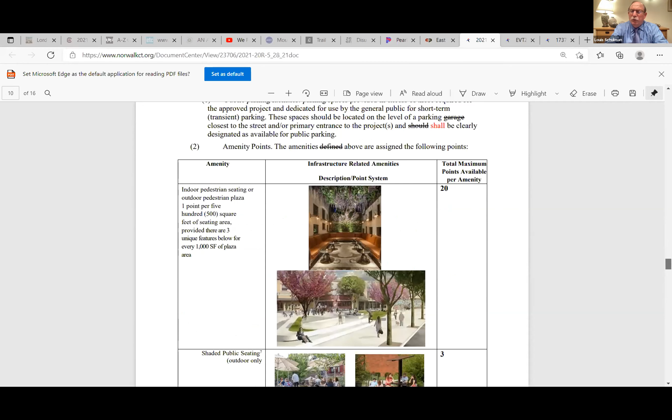So that's why I think, if you're saying, yeah, we have to look into whether we have the authority to do some of these things, but why couldn't we say you must do one of these things incorporated into your development—whether it's a green roof or solar panels or rain garden or whatever else we might have on a list—say that any project must include one of these without saying it must be this one. I think that's what it's saying here in the red text under 3A and 3B.

So if they want to get that additional density, even if it's just a story, they have to give you a certain percent. And in this one, it's two-thirds of the amenity points have to come from some of the green or sustainable measures. They could choose to do the entire thing as green or sustainable measures, but at a minimum, two-thirds of it have to be that.

But that is still different from saying you must do one of these things—not you must do one of these things to get a benefit, but you simply must do one of these things to be able to put up your project.

So you don't require that on any project now, right? So if we didn't do anything with this zone and left it NB, anybody that comes in wouldn't be required to do any of this. They would just put a building up similar to what you saw on Winfield Street. And if they decided to make it look nice because they think they can get more money for the units that way, they would do that. If they said, I don't really care, I'm just going to get what I get, you see that as well.

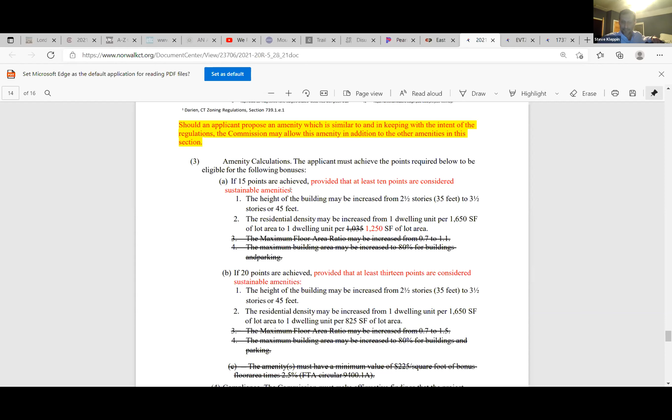Status report on the industrial zone study. Sure, so we have a draft in the office that we're reviewing, making edits on, and we're going to send it back to the consultant. So I expect that probably in 2 to 3 weeks, the draft will go out to the committee that's overseeing the study, and they'll have a few weeks to digest it and make comments. And once those comments have been incorporated by the consultant, then we'll put it out for public consumption, and then see what they say, and then look at adopting and implementing the changes that are outlined in that.

The other part of it, where I was before I came to your meeting, was I got the additional money allocated to look at the waterfront portion of the industrial zone study. So that's going to happen over the next month or so. They'll start working on that piece of it.

Okay, and you may remember on that study, we're continuing Richard Rowena on the committee, but I know Galen's very interested in that, so Galen is also going to be sitting on that committee.

Okay, zoning regulation rewrite. I think almost everybody here has scheduled a time to chat with the consultant. If you have not, please let me know as soon as possible, and I will get that scheduled. They want the meetings in July, so they'll send out a Zoom invite, but I think most people are there. We have a meeting next week with all the department heads that interact with zoning and the consultant, so that's like a 2-hour meeting.